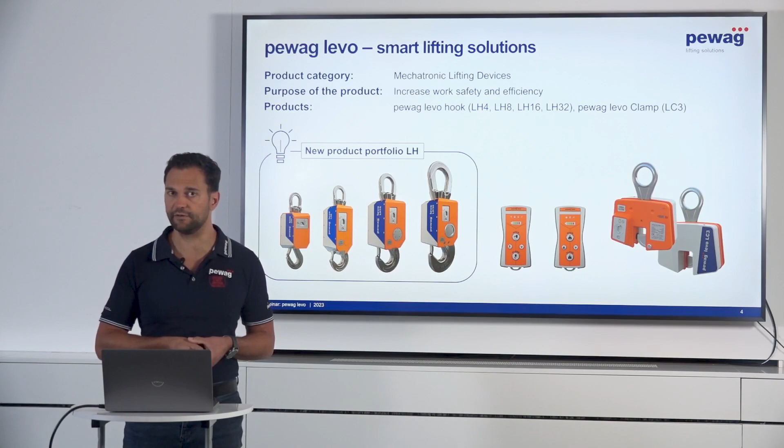The levo product portfolio consists of both levo hooks and levo clamps. First, I want to introduce the product family of levo hooks, which you can see in the lower left corner. We start from the left side with our new product, the LH4, the 4-ton hook, which is our most compact hook in the product portfolio, especially designed for tight spaces during lifting. It's also quite light from a weight perspective.

This you will see later in the product details. Then we continue with the 8-ton hook, one further to the right. This is the LH8, which shares the same housing and is at the same time the successor of the LH5 hook, which has already been on the market since 2018, when pewag started the levo program. This was the first hook we introduced to the market, now upgraded to an 8-ton hook.

The next one is the LH16, the 16-ton hook, also already available on the market, introduced approximately one year ago. Finally, on the right side is the biggest and heaviest, most massive hook in our portfolio, the LH32, capable of working load limits up to 32 tons.

In the middle, you can see both remote controls, one for the hook and one for the levo clamp. With the levo clamp, I want to continue and close this introduction of the product portfolio. The levo clamp LC3 has also already been in place since pewag started the levo program in 2018, and is capable of lifting goods up to a working load limit of 3 tons.

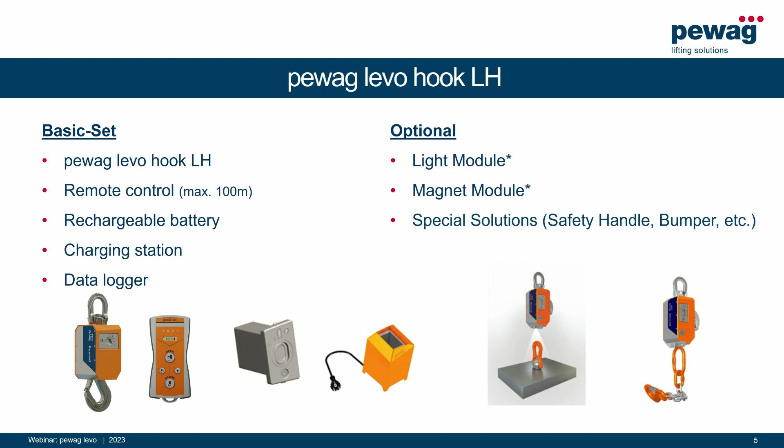Now let's go into more detail on the scope of supply. What comes with a levo hook, for example? First of all, the hook itself comes in a box together with the remote control, with a maximum operational distance of 100 meters, a rechargeable battery together with the corresponding charging station, and an embedded data logger which stores service data within the hook itself. As options, we can provide, from the LH8 onwards - because the LH4 housing is unfortunately a little bit small and compact - from the LH8 onwards we can offer all of our options.

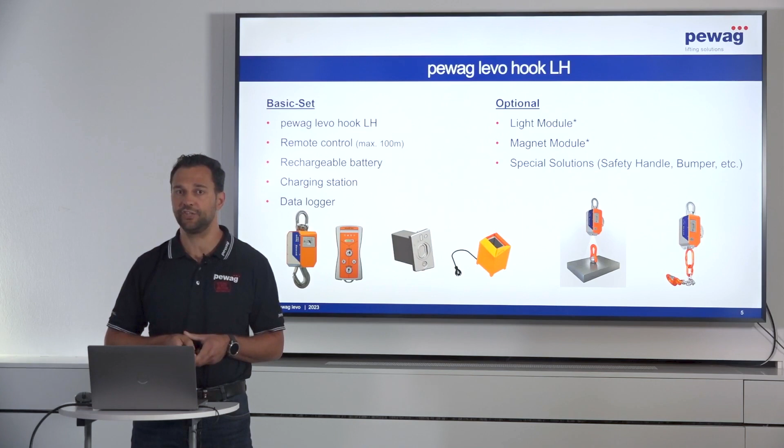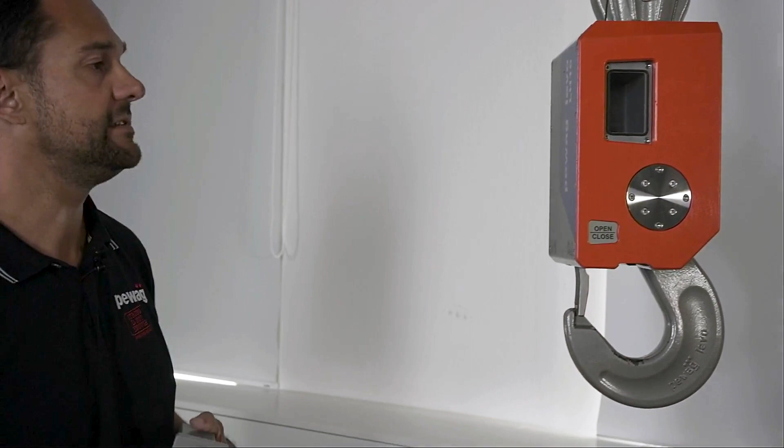Therefore, I will transition myself to the hook. We have it here applied on a short chain application, and this, what you can see here, is the rechargeable battery, which is multi-optional and multifunctional for both the hook and the clamp, what you can see later on.

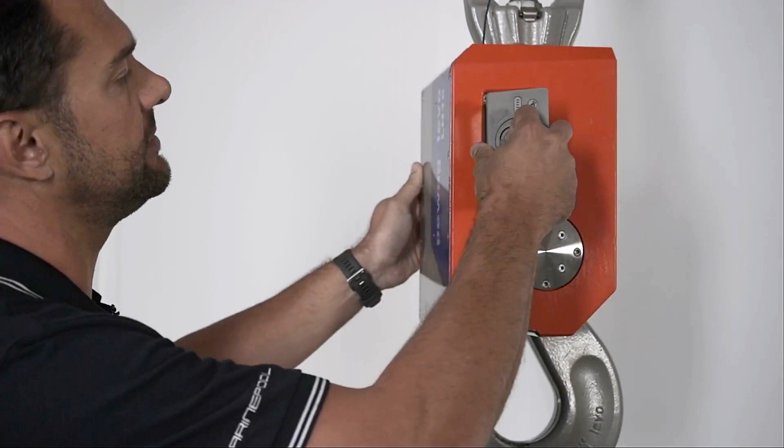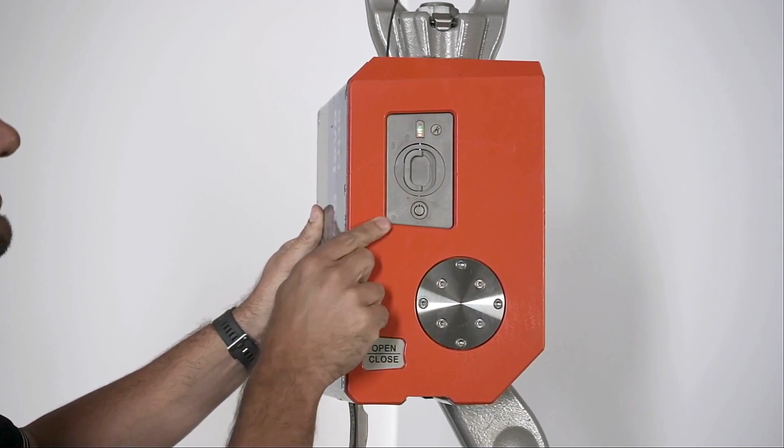To get the hook operational, I will apply the battery into the battery bay. I'm locking the battery and powering up the battery so that the hook is supplied with DC voltage. After a short self-diagnostics sequence, the hook is now ready for operation, and you can see this via the flashing charging indication light.

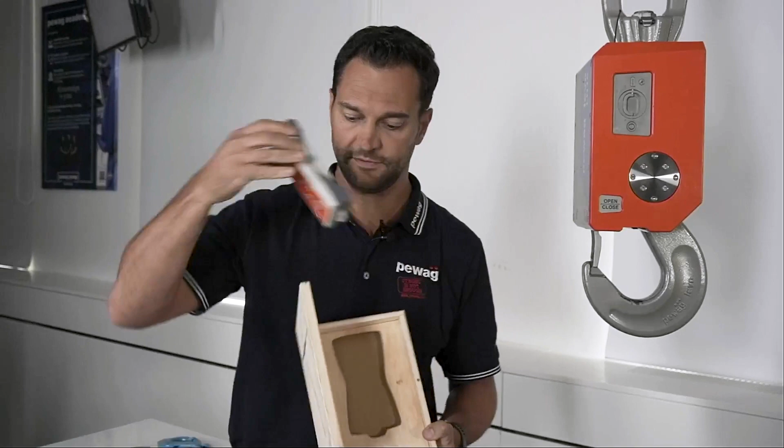Next, I will grab the remote control of the hook out of this nice wooden box, very sustainable, and I will open the hook automatically via the remote control.

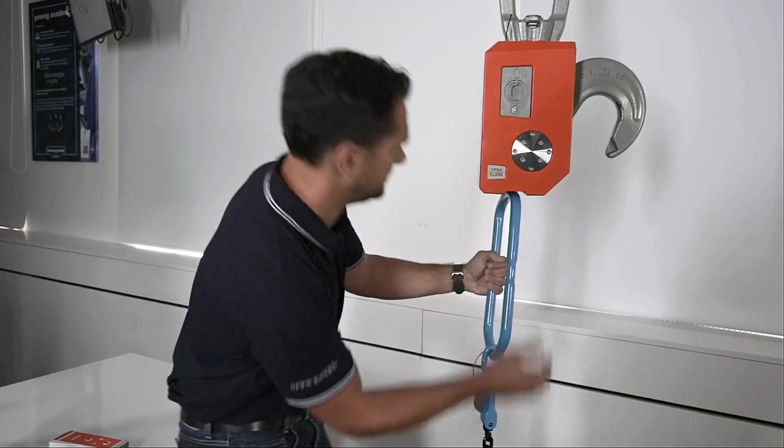The magnet is able to lift and hold steel or metal up to 12 kilograms. So now it's very easy to close without putting the fingers in between or something like this, to close the hook via the remote control again around the connector.

Yeah, this was so far the demonstration of the hook. And now I want to continue with some more details on the levo clamp.

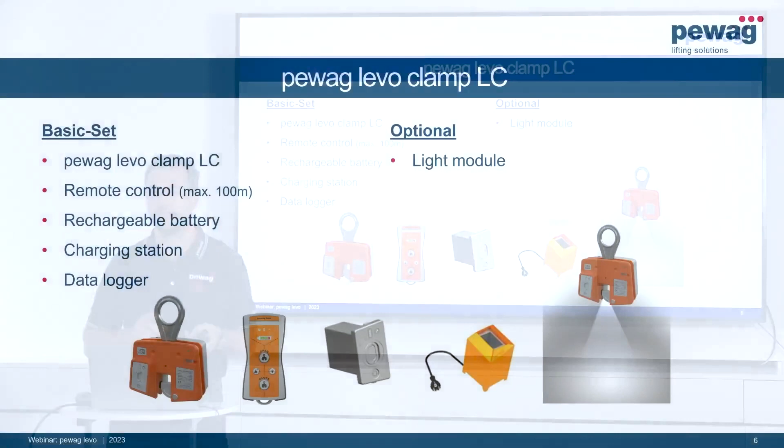The levo clamp LC, our only clamp in the market, is the 3-ton, as I mentioned before, and it comes also in a nice box together with the same goods, more or less, as the hook, with the rechargeable battery, with the charger, with the remote control, and also the data logger is embedded within the clamp.

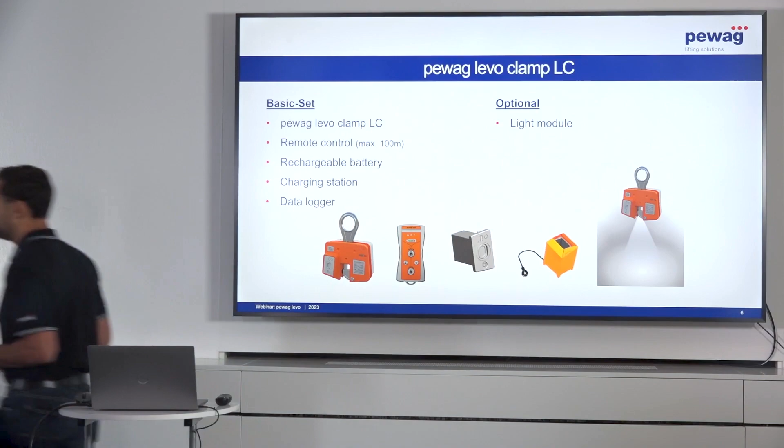Same hardware. We upgraded this hardware on both the hook and the clamp. We brought the software, hardware, and electronics mainly to the latest technical standards and technical level. And as the only option, we can offer at the clamp, because of its compact building size, the light module. Now I will show you also the levo clamp, how it's operating in real life.

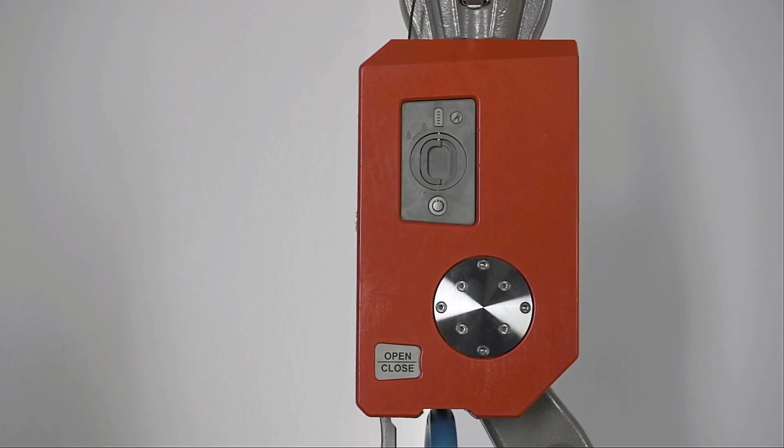So I will grab again the remote control. I will power down the battery and pull it out. I take now the battery out of the hook to demonstrate that it's also working within the battery bay of the levo clamp.

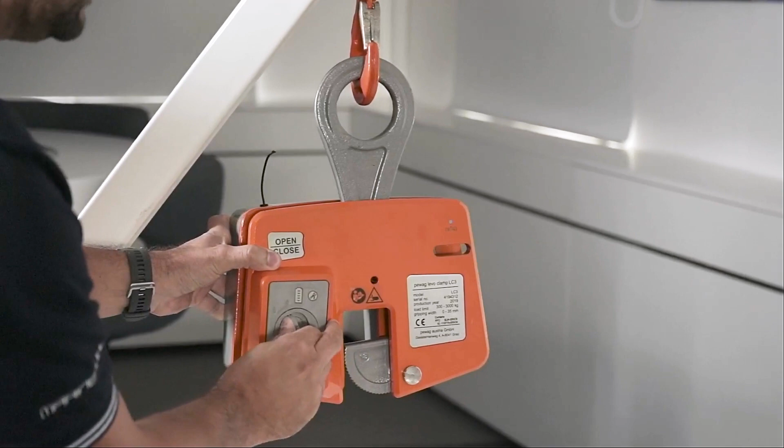So the battery is now locked. Same procedure as with the hook. After finishing the self-diagnostics, the clamp is also ready for use.

And now I show you the operation. Open and close via this open-close button embedded into the housing, and closing again. So this is how the levo clamp is working.

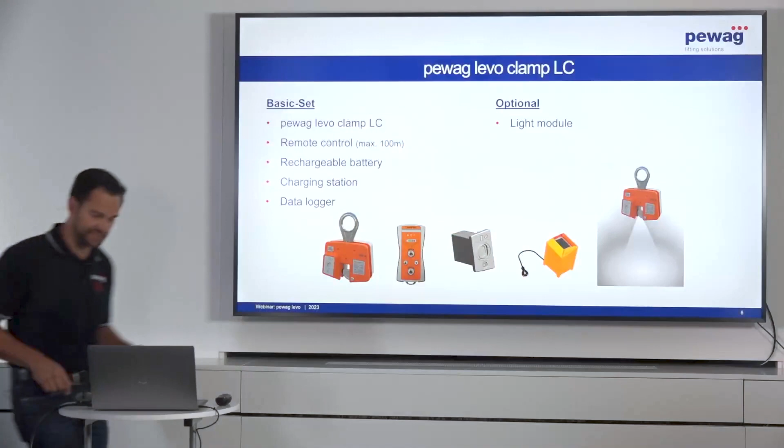And the levo clamp was originally designed to lift steel plates up to a thickness of 30 millimeters. This was the original purpose of the market launch of the levo clamp LC3.

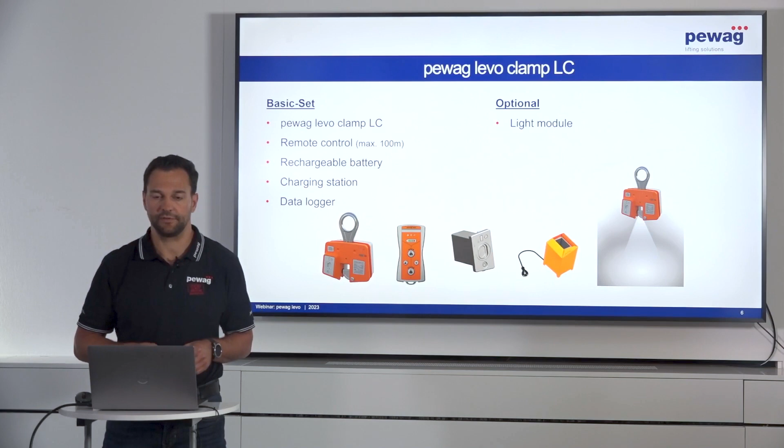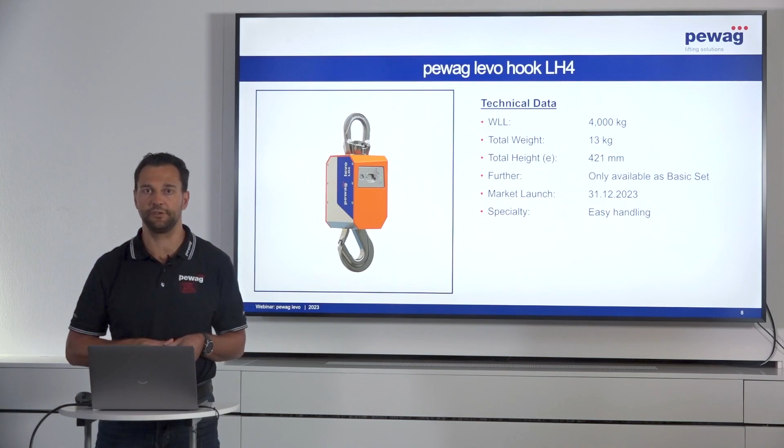Coming now to the product details and giving you an overview of the technical specifications of the hooks and the clamp. First we start with, as I have mentioned before, the most compact hook we have now in our portfolio, the LH4. Its special purpose is to use this hook within a quite tight working space.

This was a special need from several customers, that they have limited space between, for example, the lifting beam and chain sling and the lifting good, so to say. And therefore we designed this compact hook.

It comes with a total height of 421 millimeters and a total weight of 13 kilograms. So you see, it's very easy and light to operate for one person alone. And it's available from the end of this year.

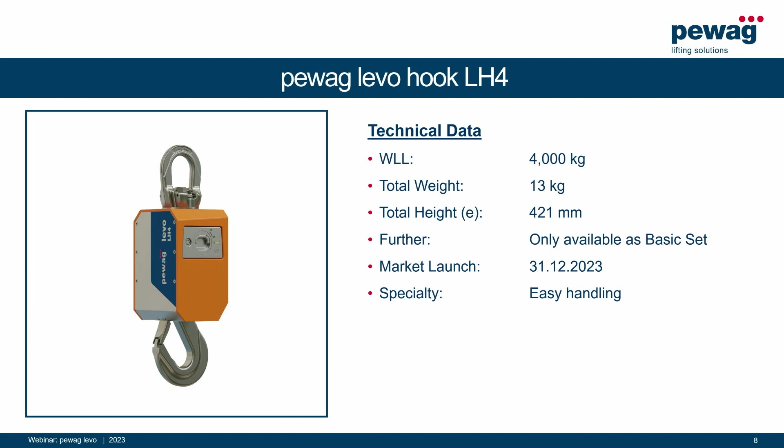Next one I want to mention is the LH8. And as I said at the beginning, this is the successor now of the LH5 hook. The LH5 is still available on special request, but now we offer a more powerful hook.

So we upgraded the hook itself from a mechanical perspective to an 8-ton hook, and the housing, size, and weight are still the same. So 20 kilograms, also easy to handle, with 460 millimeters of total building height.

And we have from this hook onwards the possibility to offer all of the options we have in our portfolio, meaning magnet and light mainly.

As you have seen before in the live demonstration, our LH16 hook is already rated for a max working load of 16 tons, and the total weight is here 59 kilograms. The total height is 609 millimeters, and as you have seen before, it has a stronger magnet than the LH8, and the magnet is really strong, as you have seen before.

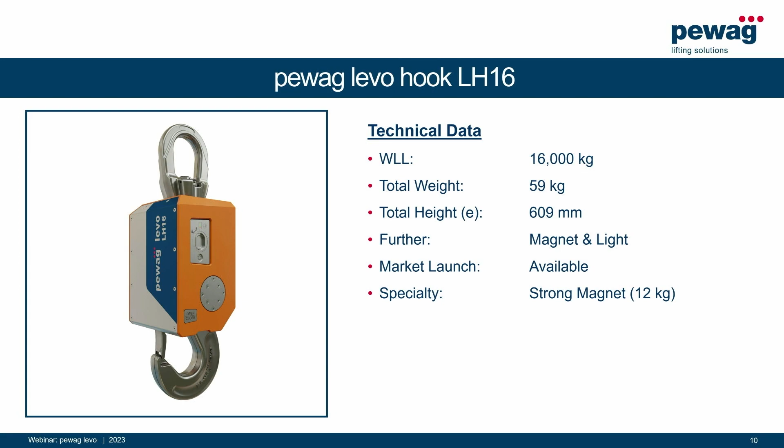And finally, the most massive and biggest hook we have in the portfolio, available from end of September onwards, is the LH32 for a working load limit up to 32 tons. It has a weight of 79 kilograms and a total height of 666 millimeters.

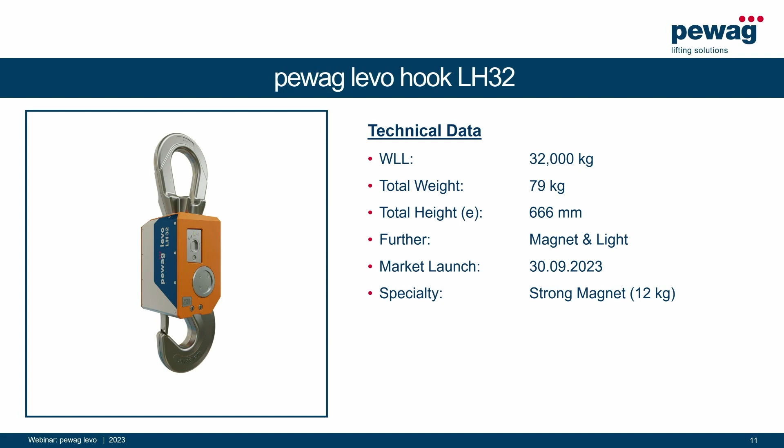Then finally we come to the Levo clamp LC3. As I said before, the Levo clamp was originally designed to lift and operate from the lifting procedure of steel plates up to a thickness of 30 millimeters. And it's important to know that a clamp has not only a maximum working load limit of 3 tons in this case, but also a minimum working load limit.

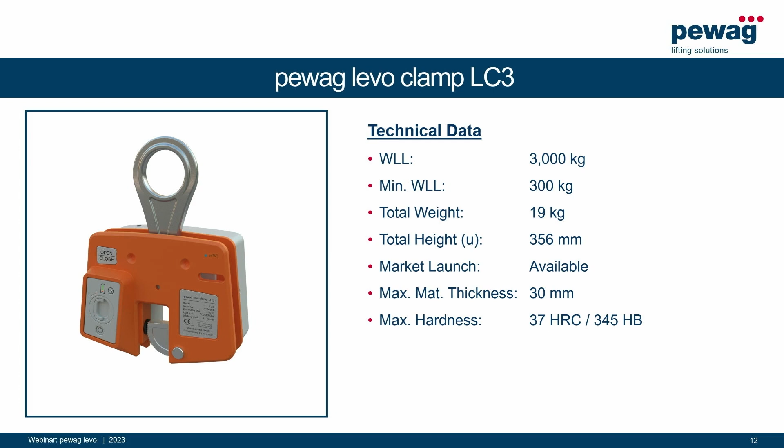It is 10% of the maximum working load limit, in this case 300 kilograms. The maximum hardness we can lift with this clamp is 37 Rockwell or 345 Brinell. And as I said before, it's already been available in the market for some years, now coming with an upgraded inside of the product, so to say.

Then I want to show you some special solutions we did in the past for customers. And there I want to start with the safety handle.

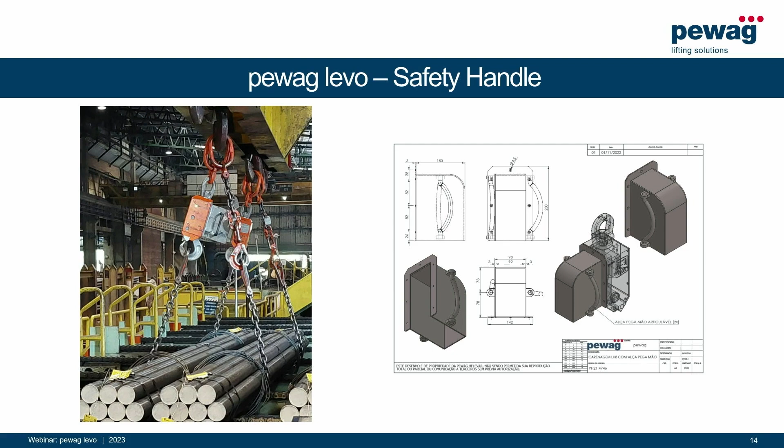The safety handle we did initially for a customer in Brazil, for a steel plant in Brazil. The main purpose and request from the customer for this safety handle was to increase the feel of the hook itself. For example, when a worker is doing a mounting operation several times in a sequence, it is much easier to grab the hook via the handle and to position and reposition it one after the other. So this makes life easier if a worker has to stand next to the hook for a mounting procedure, which is not always the case.

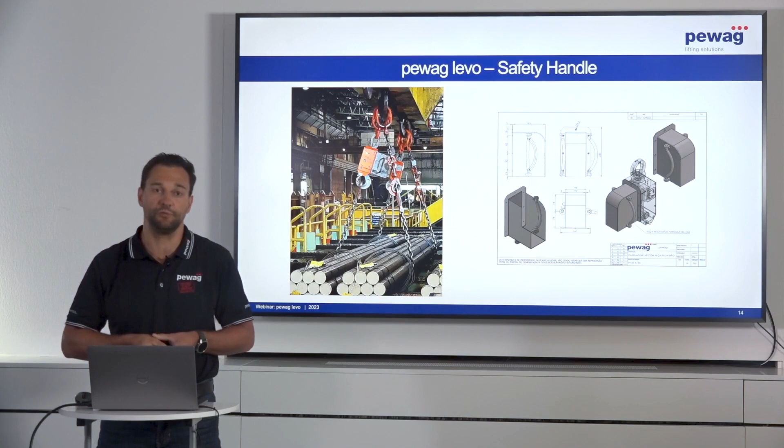The next special solution I want to show you is the special protection for the hook, and this is also sometimes important. We have seen several operations in the field where the hook is operated under very harsh environments and conditions. Under no load, for example, the hook is moving and swinging around, and it can easily collide with any installation, for example the load beam, or with any other hook or whatever. So to prevent the hook from any damage, especially the electronics, the motor inside, and the battery, we designed a special protection we call a bumper. It's made out of a synthetic material which is stiff enough, but also elastic enough to compensate for such hits during operation.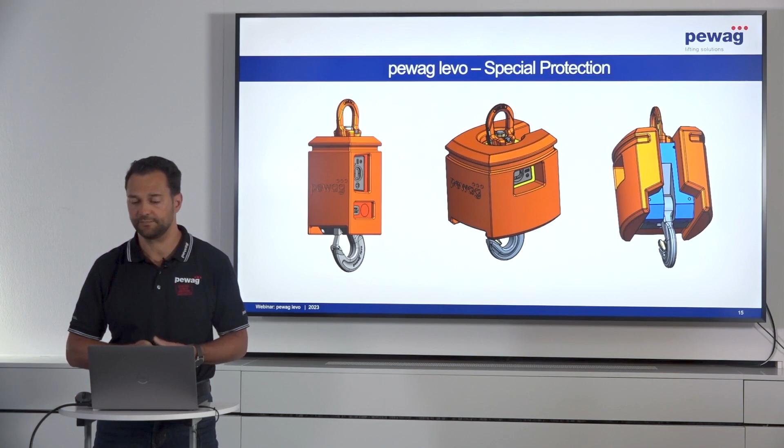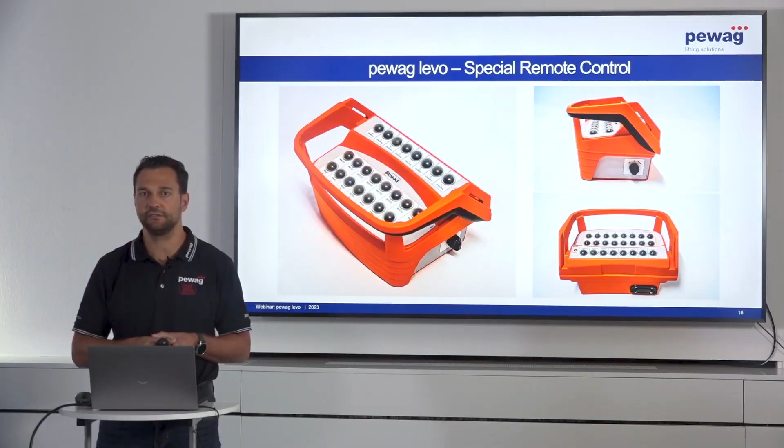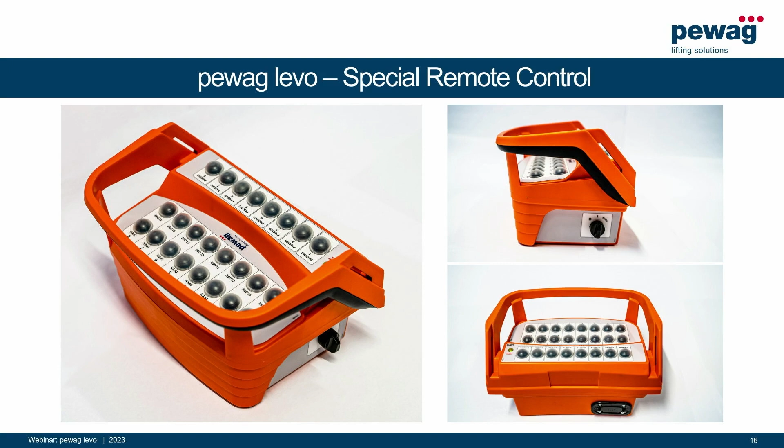Then we did some special solutions also on the side of the remote control. Here, on a special customer request, we designed a remote control which can operate up to 8 hooks, not synchronized, but independently. We designed the remote control to be very easy to control and handle, so we only attached the open, close, and pair buttons on this remote control. This makes it more efficient when a worker is standing alone in a factory or production hall and can operate on 8 different locations, for example 8 different hooks.

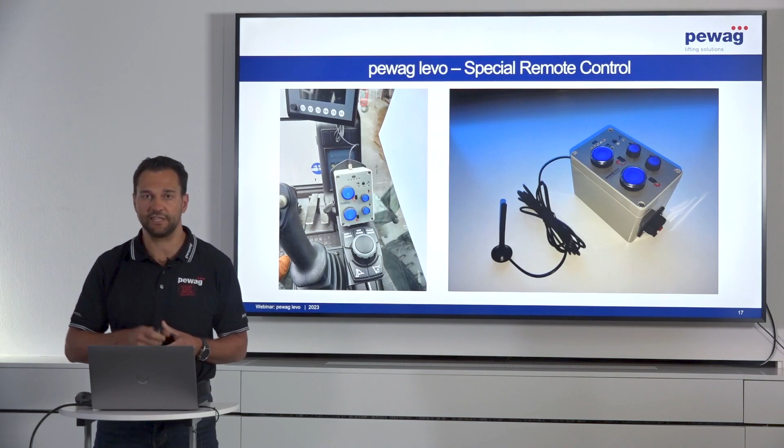Another special solution, for crane operators in this case, is a remote control they can operate inside the crane cabin. The speciality here is that it needs no external battery, and is fed with power via the onboard supply of 12 volts of the crane. So the crane operator doesn't need to step out, and no additional person is needed to operate the hook.

The next topic I want to introduce to you is the target industries. It's nice to know where our Levo products are already in operation. First I want to start with, so far for us, the most important industry, I would say, the steel industry. And here especially we are focusing on non-magnetic steel.

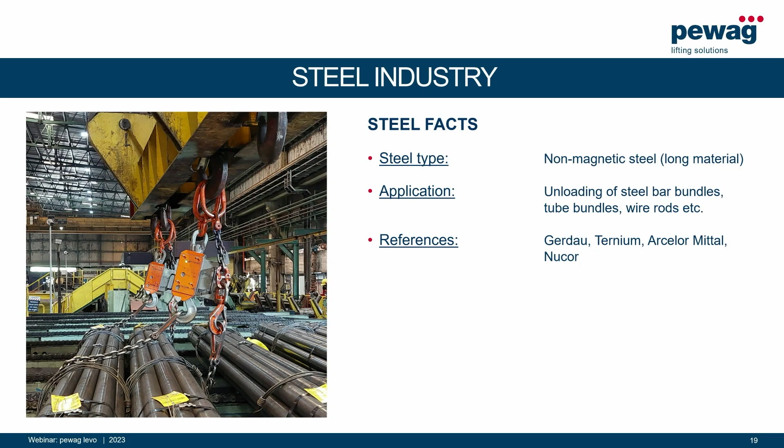So why non-magnetic steel? Because we learned that magnetic steel is lifted at factories with very strong magnets, so this is not really a use case for our hook. The use case for our hook is in steel factories, lifting steel beams bundled with wire rod, for example, as you can see here on the left side in the picture. Here mainly loading and unloading procedures and operations, for example lifting up a steel beam bundle and positioning it or transporting it to a wagon or a trailer, which you can see on the next slide in this video.

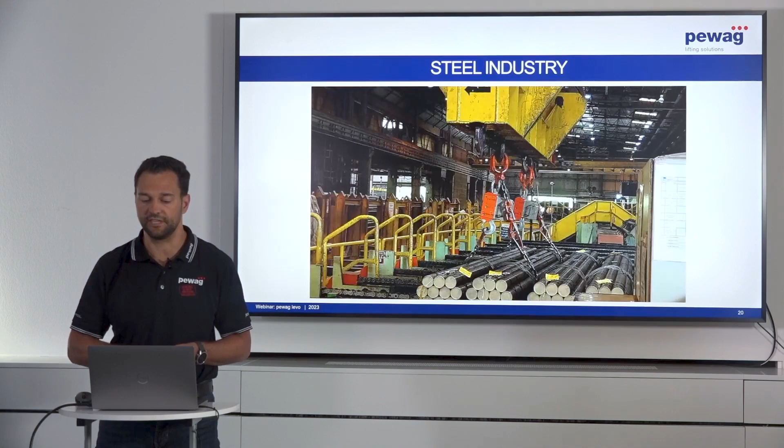So now it's starting.

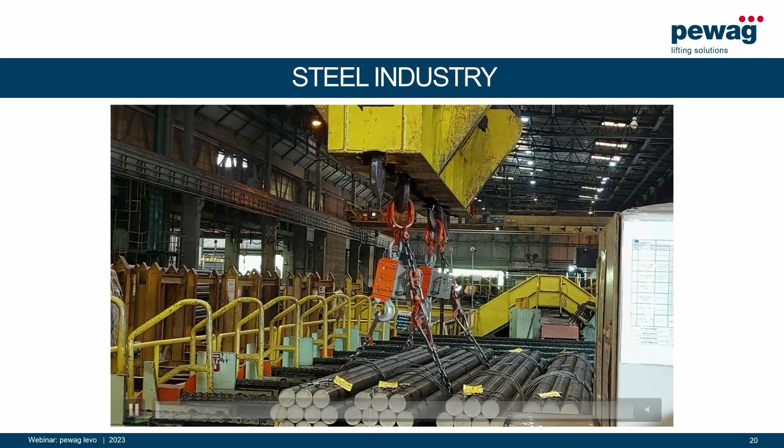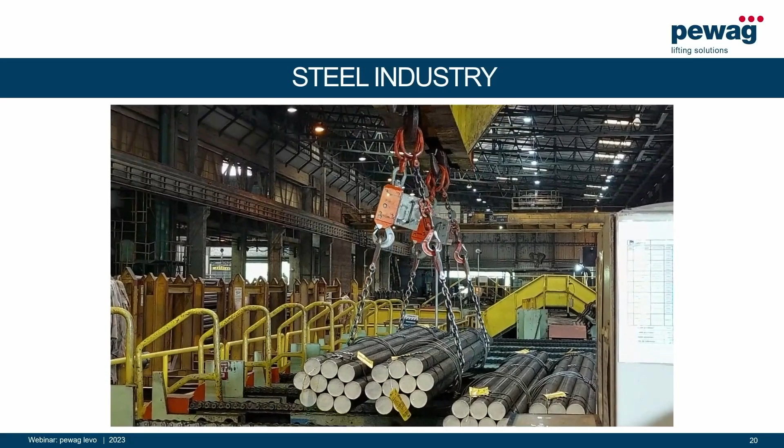What I have not mentioned, we have already some famous names in the industry as references, like Gerdau, ArcelorMittal, or Nucor Steel in the US.

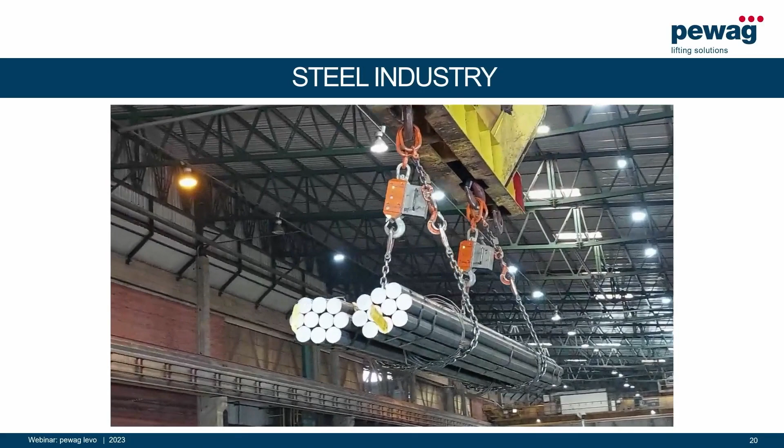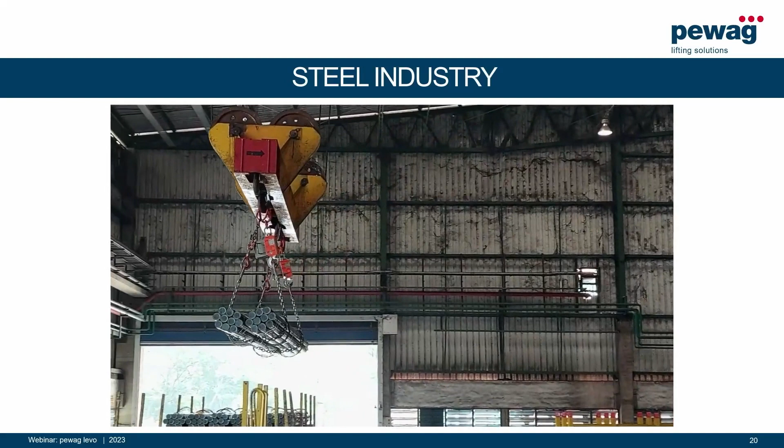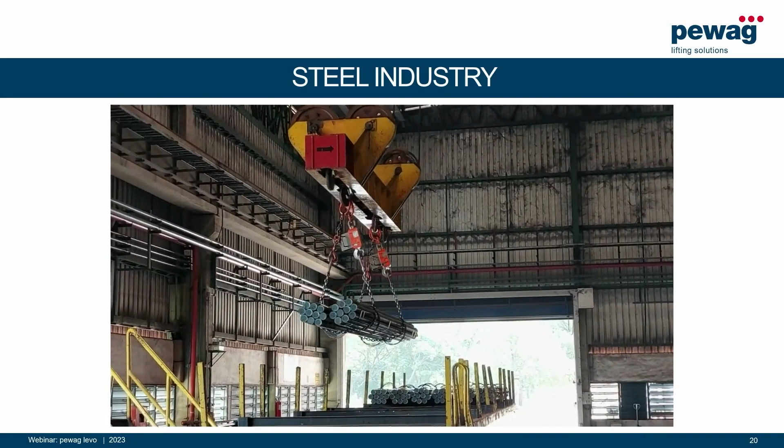Here you can see the lifting operation has started. The hooks are already applied, and attached to the hook is this handlebar, what I have mentioned before. The portal crane is transporting now the steel beams to a trailer. After the positioning overhead, the trailer is finished, the crane can come down with the bundle of steel bars, making the fine-tuning in the positioning.

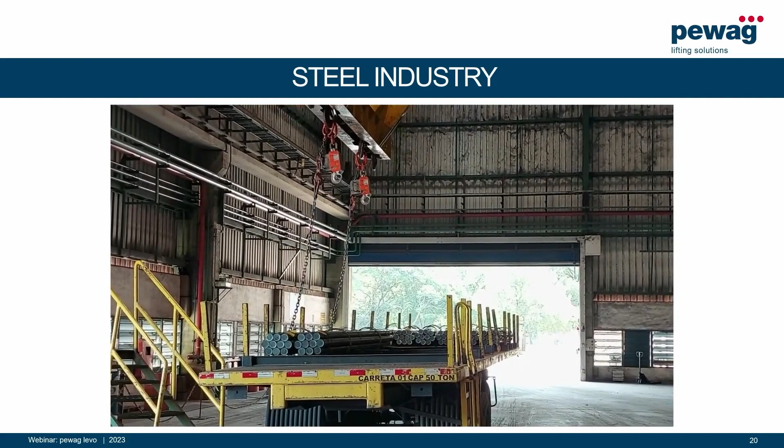What is also important, what you can see here below, is that there are some distance holders between the bottom of the trailer and the steel beams. After the hooks have opened and released one side of the chain sling, the other side of the chain sling can come out of the bottom side of the steel beams. So the lifting operation is finished, and the crane is ready to pick up the next pair of bundles.

The next industry I want to show you, what is also important for the usage of our hooks, is the port industry. But when we talk about the port industry, we do not mean the most famous cargo operations, lifting operations with these containers.

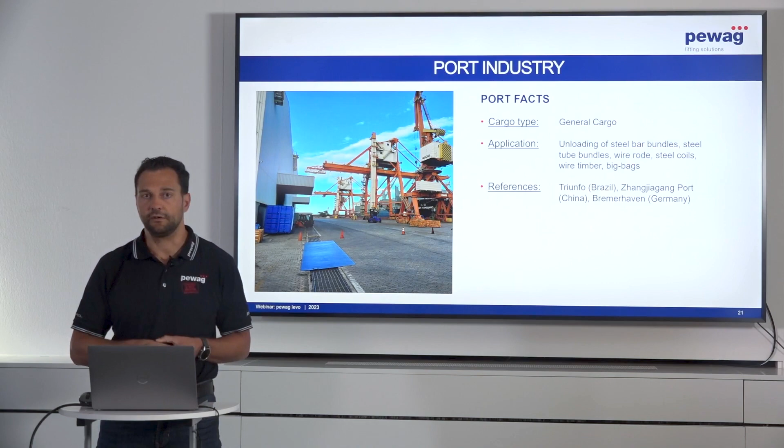We mean the general cargo, so everything meant with open goods—for example, big bags, timber, wire rods, steel bars, as you have seen before—all of these open cargo topics, which will be loaded into open cargo ships and vessels. As references, we have ports in Brazil, northern Germany in Bremerhaven, and also in China.

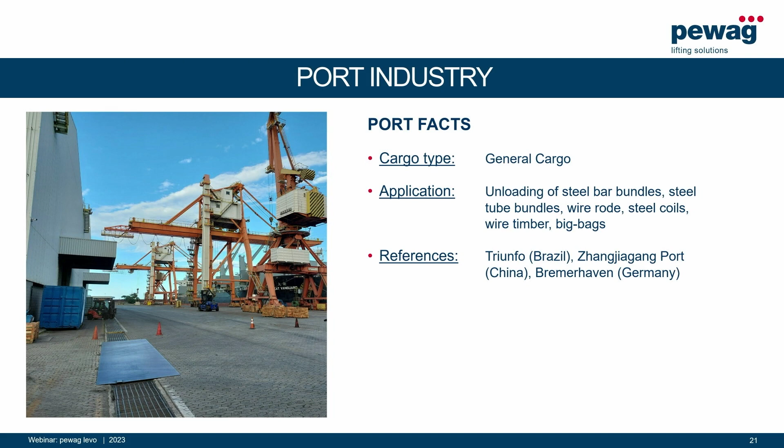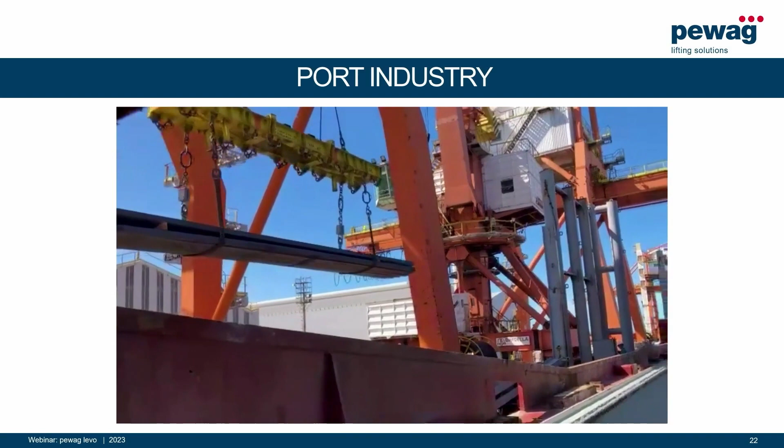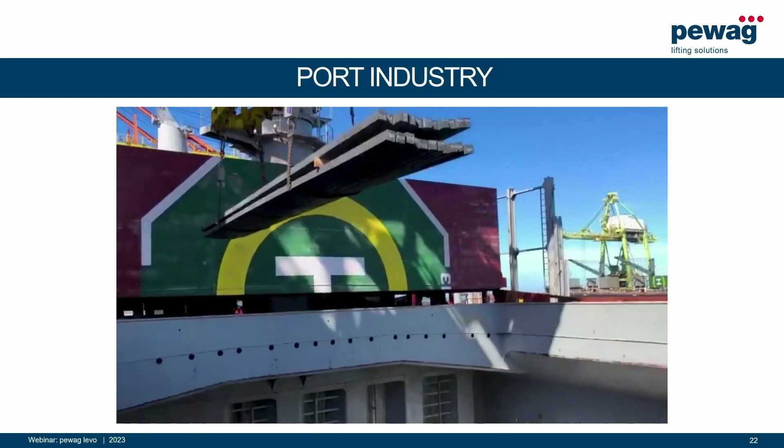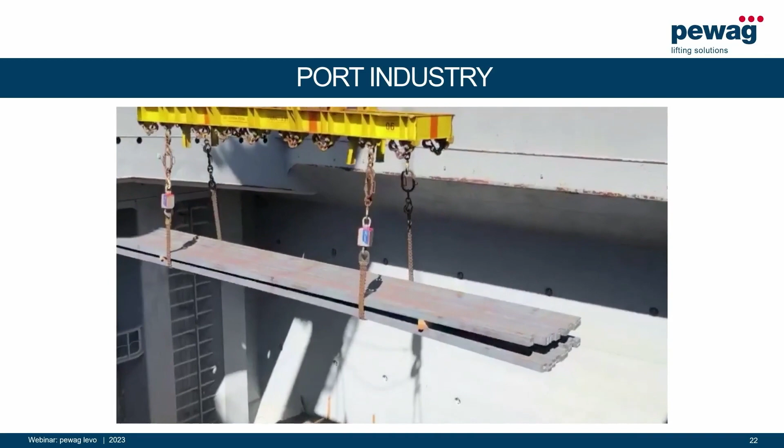Now you can see in this video a good example of a lifting operation of steel bars into such an open cargo container ship. You can see here the steel bars bundled with a chain sling and two LH16 hooks attached, mounted via a lifting beam, and the load is now lifted into the open cargo compartment of this cargo ship.

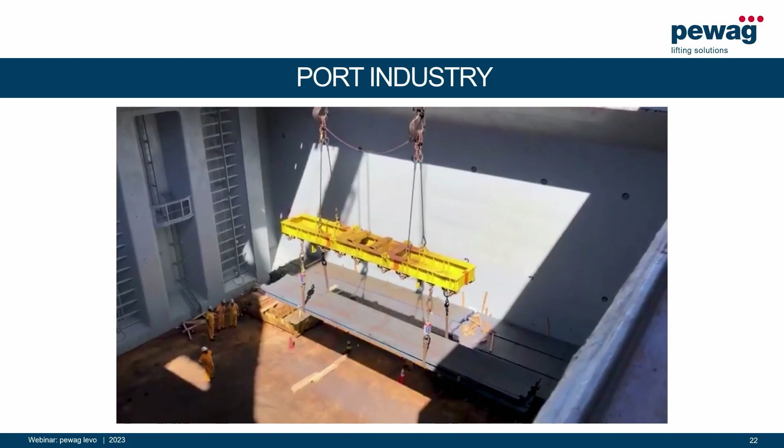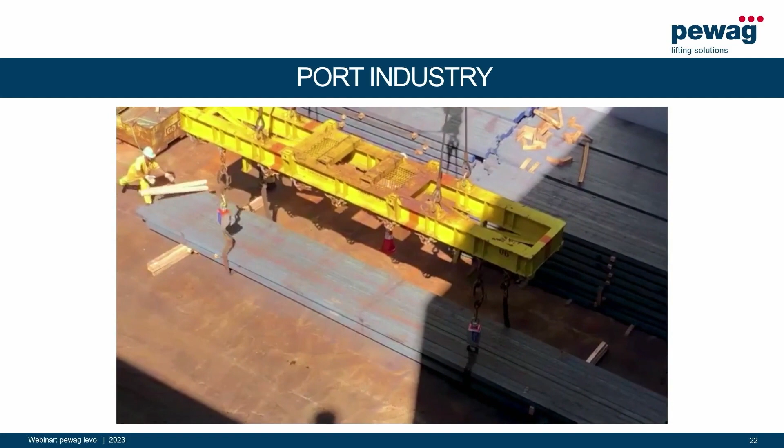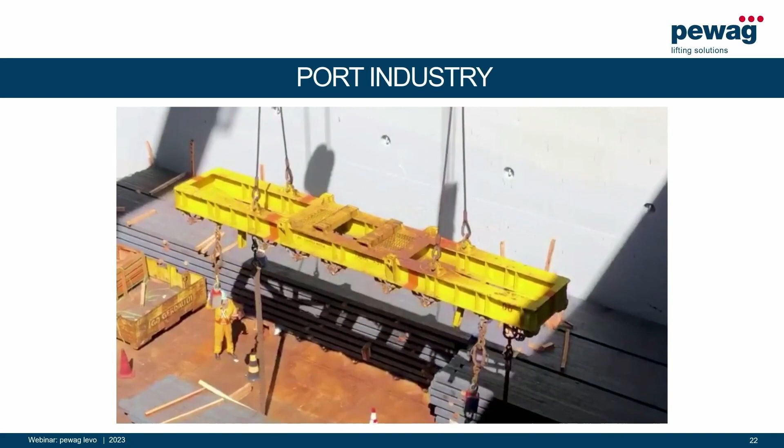What you can see here also in this total view very well is that the workers can stand at a good distance from the lifting operation itself. Hooks are opening now remotely controlled from a distance, and the lifting beam is ready for the next lifting operation. Chain slings are released now, and the crane can lift the lifting beam up again.

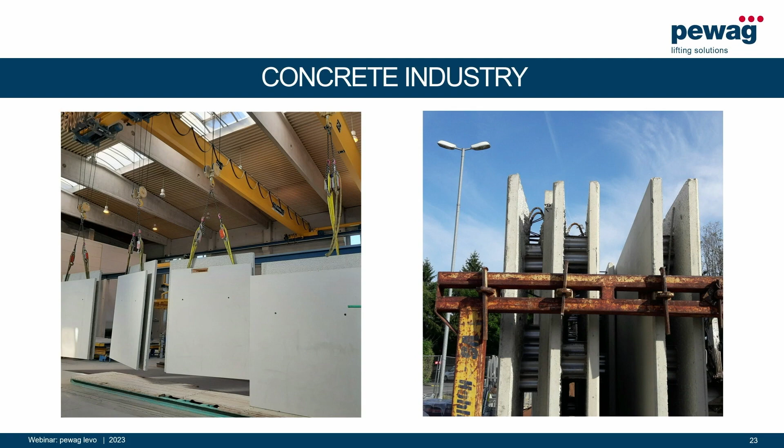So you can see, various industries have various different requirements, and each application might have its own requirements. So please don't be shy and let us know if you have any special lifting requirement in your industry which could fit our automated hooks and clamps. We are ready to help you, we are motivated to help you with your special solution, and just don't hesitate to contact us.

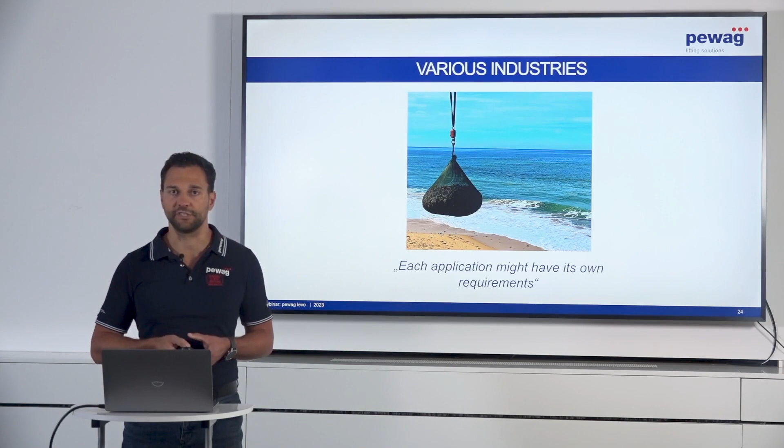Finally, coming to the conclusion: what have we done with the Levo product portfolio? We introduced new hooks for new working load categories, mainly 4 tons and 32 tons. We updated the hardware and software of all the hooks and clamps, bringing the electronics, the battery, and other parts and components to the latest technology requirements and standards. We have hooks and clamps for every industry, and we are also happy to help you with any customized solution or special requirement.